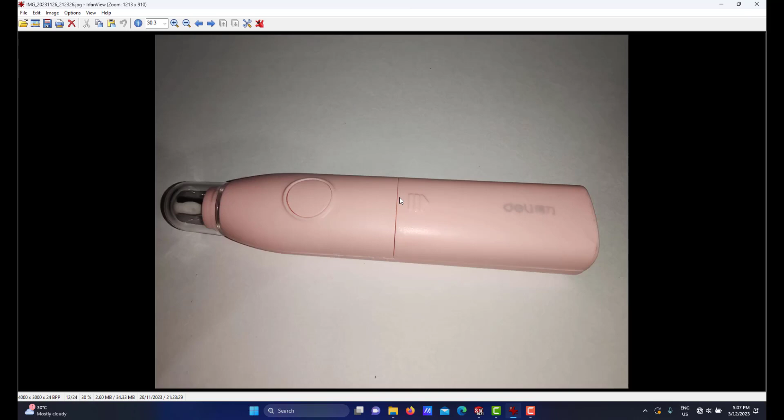For this video, the first thing I'd like to show you is how we can do splitting. If you look at this photo, we have a split here. Let me do sketching. What I mean is we have a split from here. For the top casing, we have a distance of 80. I already took the measurement from up here, and we have a split of 80.

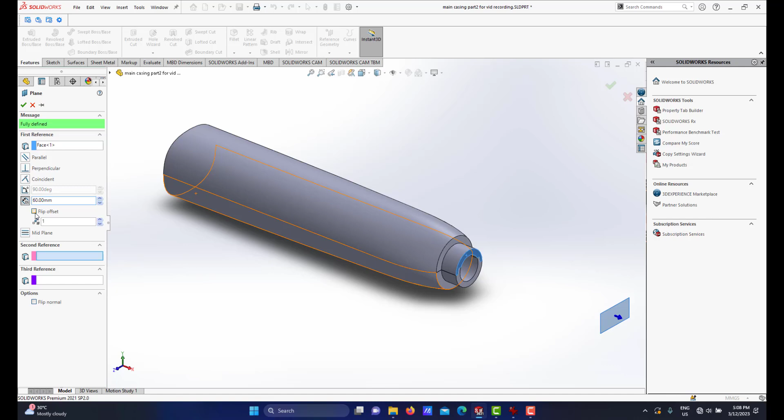So I will create a plane, starting from here, with a value of 80, going in that direction. So I have plane number 9 here. This plane 9 will be my cutting plane to split the top casing into two parts.

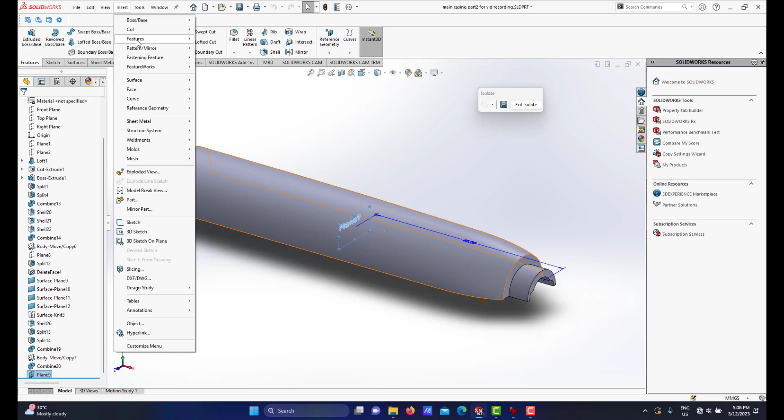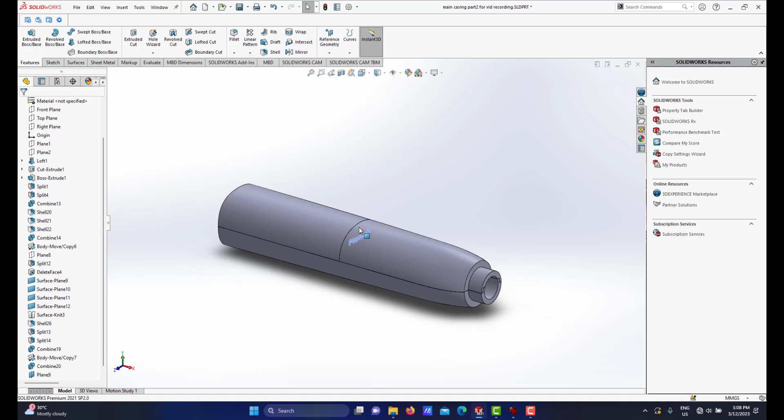I will isolate this top casing and use plane 9 as my cutting plane. Under Insert, we have Features, then Split, then Cut Bodies. I will select both and make sure Consume Cut Bodies is unchecked. Now I have two bodies, the front part and the rear part. Let me exit the isolate. So the top casing has been divided into front and rear parts.

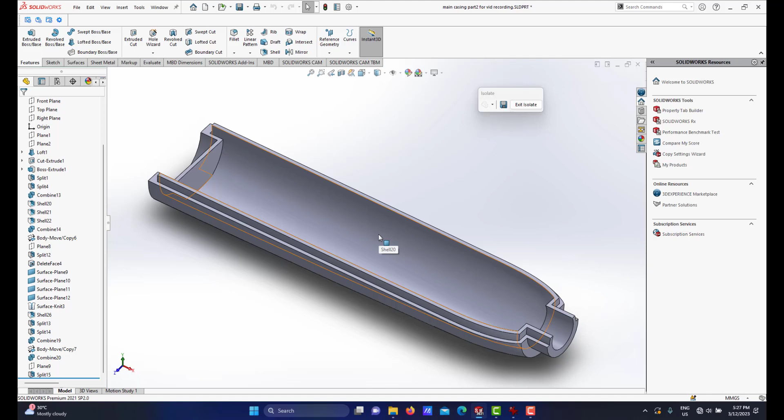My next move is to isolate the bottom casing. If you look at the bottom casing, we actually have a partition here, a partition wall. I will create that partition wall by doing a rib in SolidWorks. Let me give you another view. We have a partition wall here. I already did the measurement: from this back plane to the middle of this partition wall is 50.

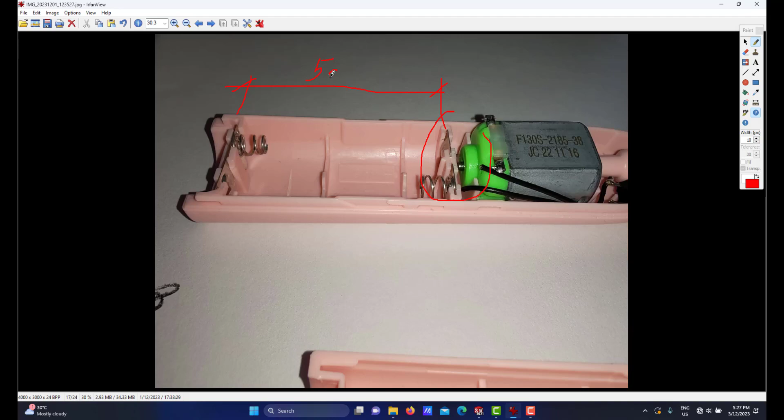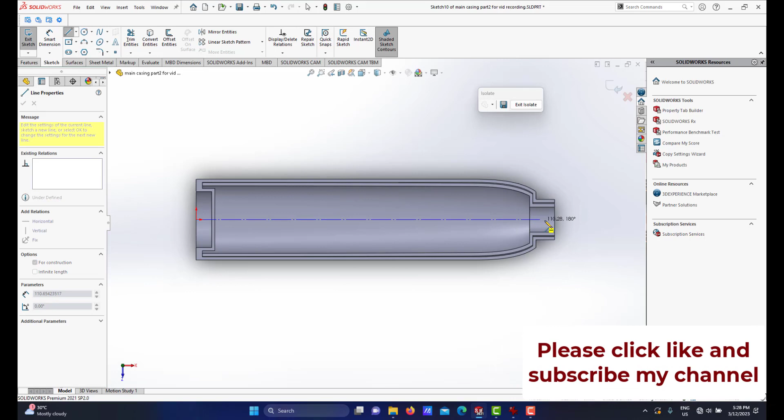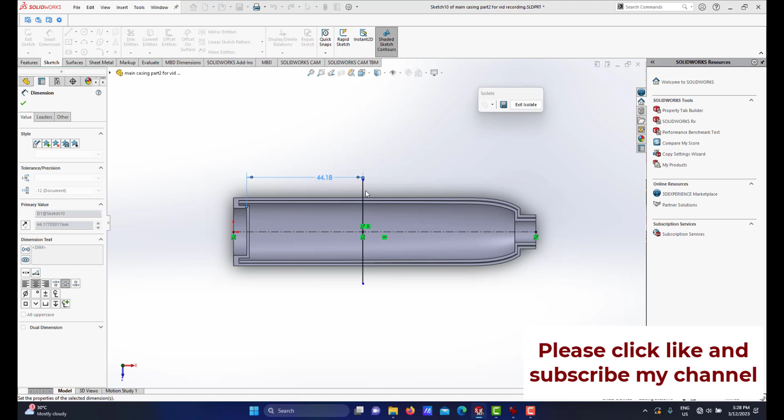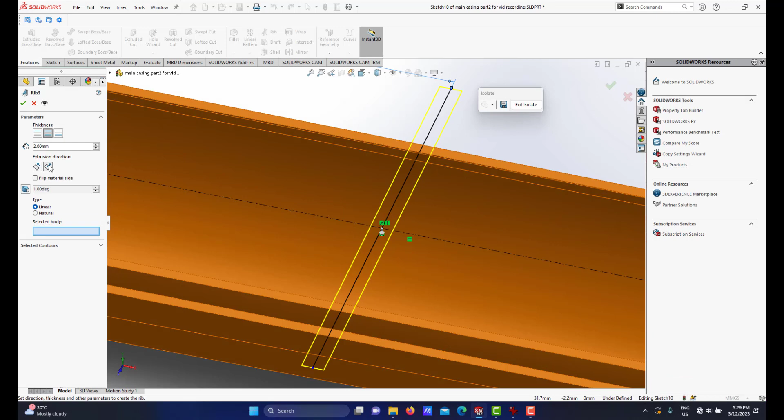So now the distance is 50. What I will do is create a rib, using the Rib feature. Make sure the pointing direction to project the material of the rib is right, pointing right and left, not this way. So under the option, I select pointing downward, set the rib thickness to 2, and under selected body, I select the bottom casing. Then I click OK, and SolidWorks will produce a rib here, a partition wall.

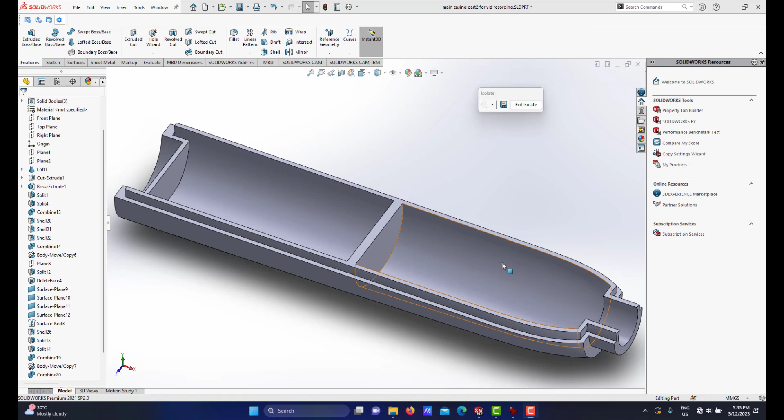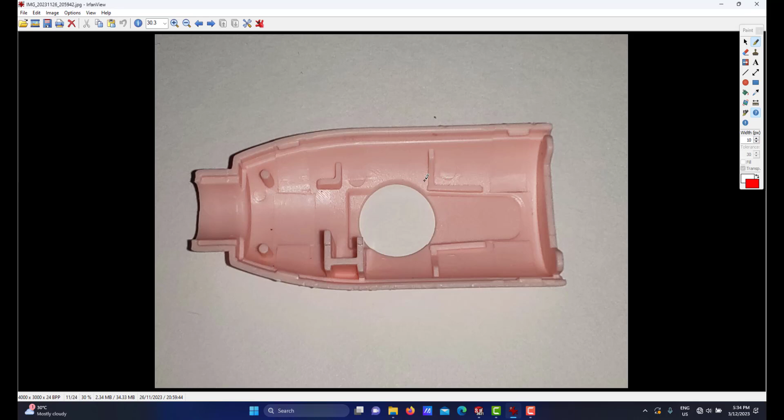Let me show you on this photo. This is the rear part. So when we mount it, it will snap at that slot and groove. If you look at the rear part, let me show you—this is the rear part of the top casing. So we have a key here. I will show you later how to create a key, and this key will slide into this slot. When it goes in, it slides into the slot and snaps into place. So these are snap features where we mount the rear top casing, fitting it into this position using snap features.

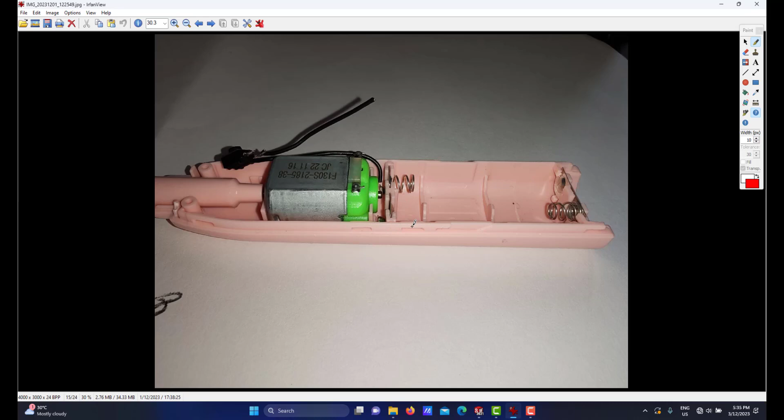So what I will do, let me show you this photo again and give you a proper view for this one. I will create this sketch to make these features, because since the bottom casing has lips, I will do these features on the lips of the bottom casing.

I'll also show you how on the front end we have two grooves here. Let me show you how we will do that in SolidWorks. If I go to my SolidWorks file, this is my bottom casing.

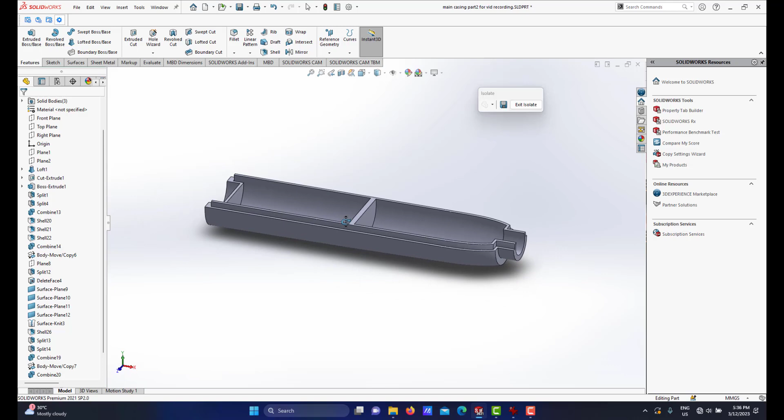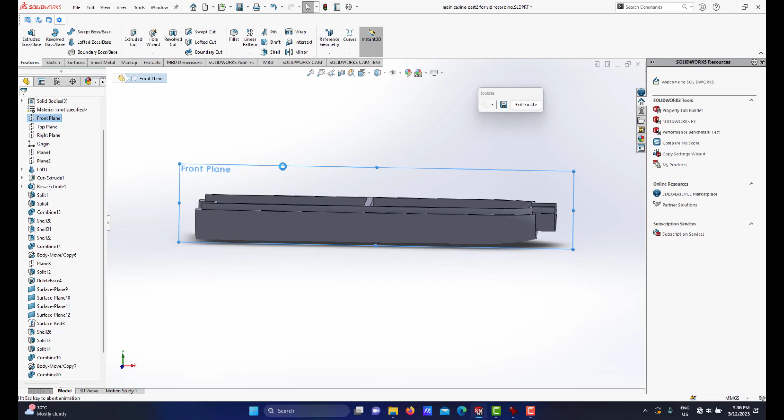What I will do, under the front plane, I will make the sketch of the slot, the groove. I mean on the front plane, I will create a sketch. So this is the front plane, and I will create a sketch like as shown here.

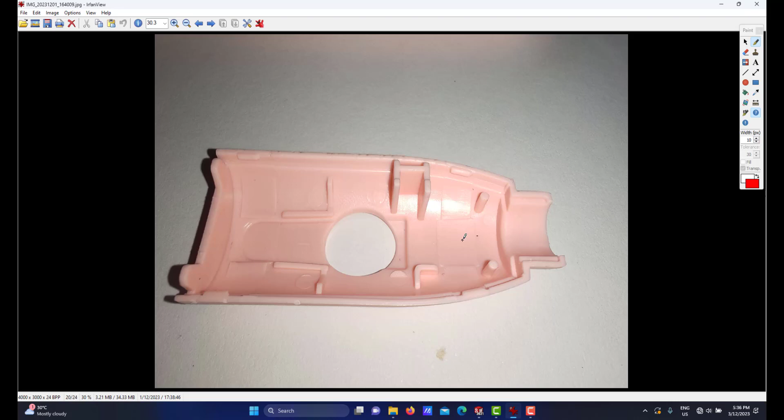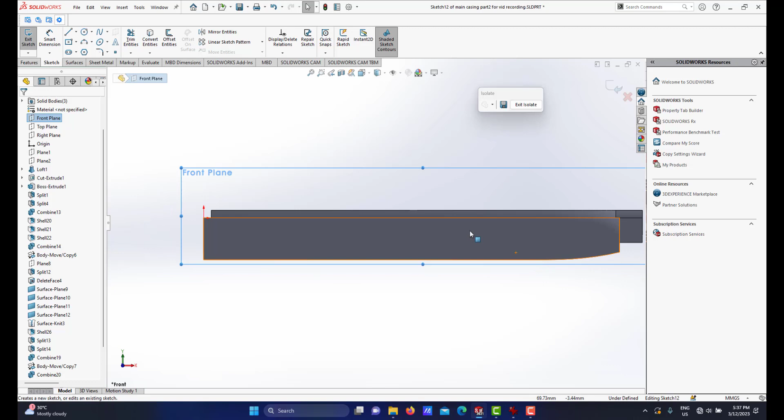I already did a sketch on that. If you look here, this is the bottom, and this is the sketch that I already done. This is the partition from the partition, the distance is there, so I created a sketch like I've shown here. Let me go for hidden lines visible, then I can see the wall partition.

Since the sketching is, because this is the top of the lip, the bottom of the lip position, the sketch will be here. Since the thickness here is 2 millimeters, the height of the lip is 2 millimeters, I will do a sketch like as shown in this photo.

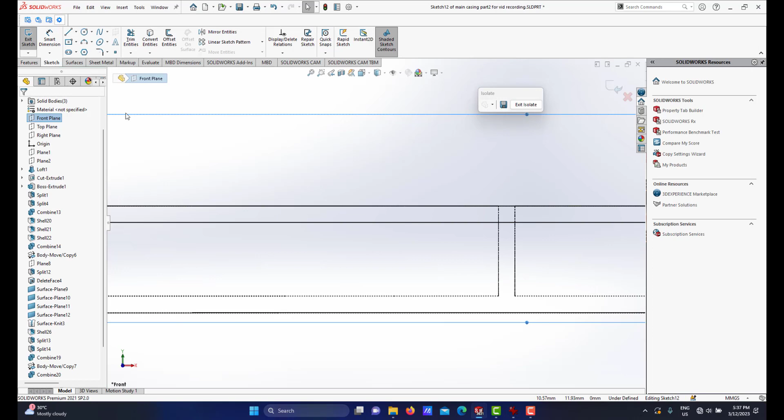So I will create a sketch here, and let me show you. So here, and it touches this point, and it will go like this, and it's 1 millimeter thickness, and it's straight like this, and it goes like that.

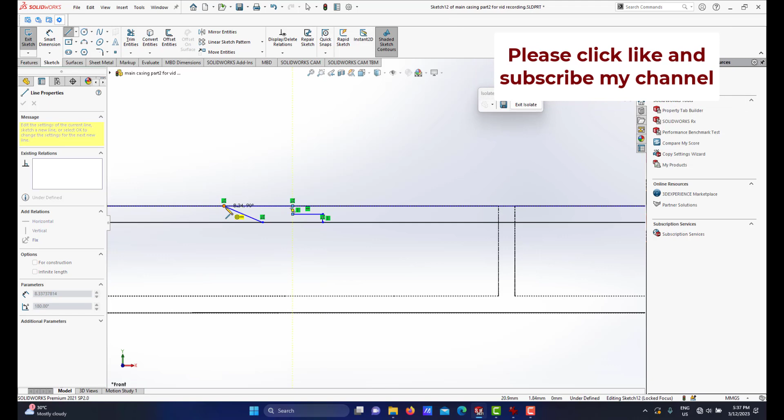The dimension here, if you look, from here to here this is 4. Before I do that, I'll make another one for the groove of the key. I create a corner rectangle, one is here, like that.

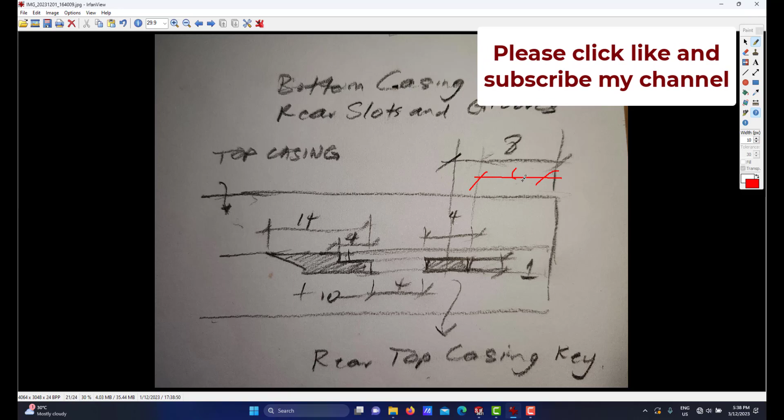Now I'm giving the dimension. The dimension is 4, and the distance to this partition is 8 from the middle here. It means that from here to here is 6. So that is 6. I will give a dimension, I create a dimension from here to here is 6.

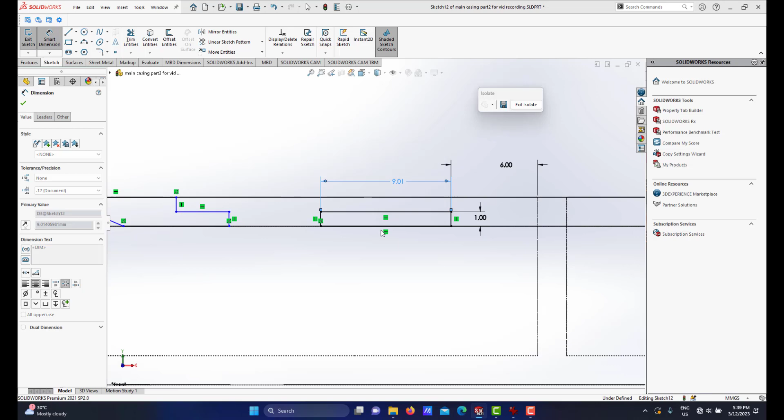Then the height, since this is 1, and the length of the groove is 4, and the distance from this to here, if you look under my sketches, is 4. I give all the dimensions needed to create this. This is 4, and the height is 1.

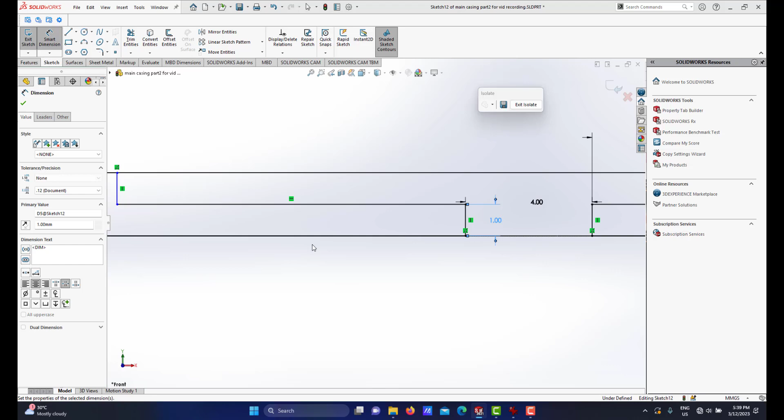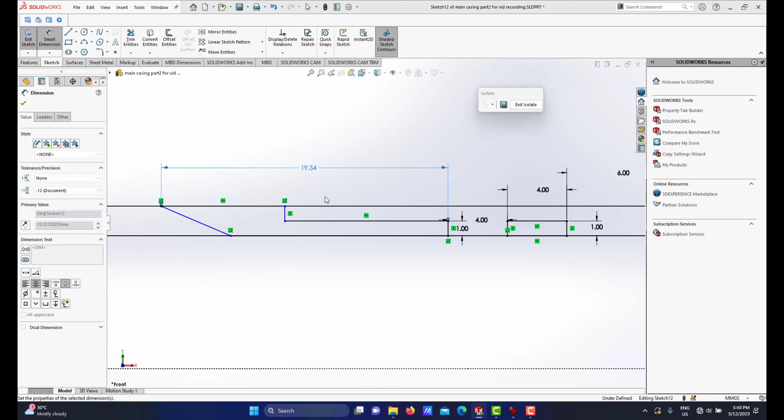As you can see, here is 4 and here is 14, so just from here to at the end here is 14. Hold on, it's not reading. And on this one, I can simply sketch like this, I can simply drag this thing.

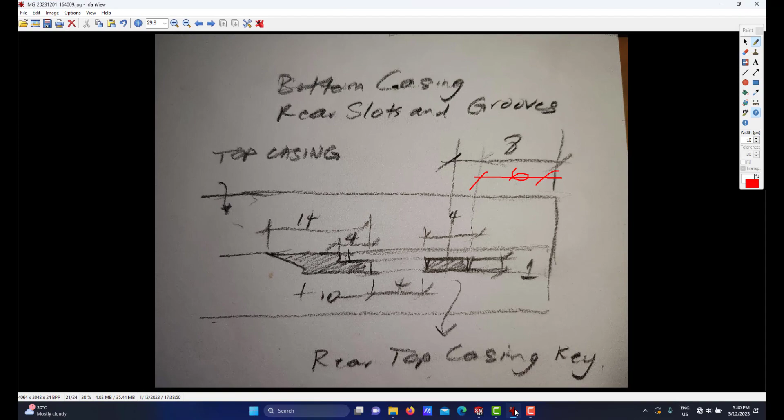And if we have 4 here, this is 4. Then from here, here is 10. Okay, I have a fully defined shape for the position at this side for me to create the slot and the groove. Let me check here.

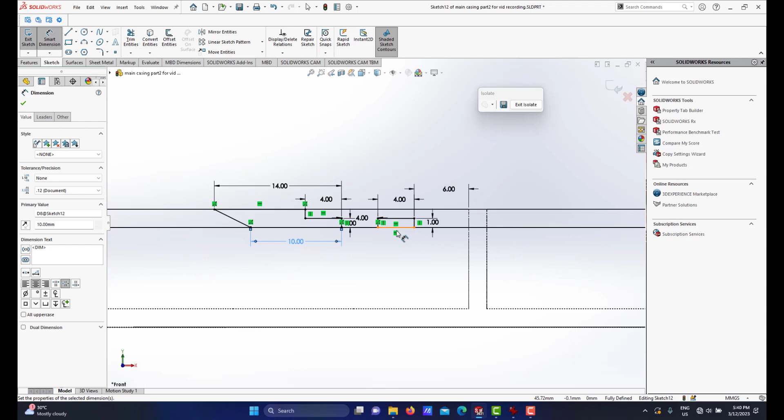Alright, another sketch is at this end, this side. If you look, I have the sketch. Hold on, this side, okay this is the end. From at the end here is 6, and this is the distance.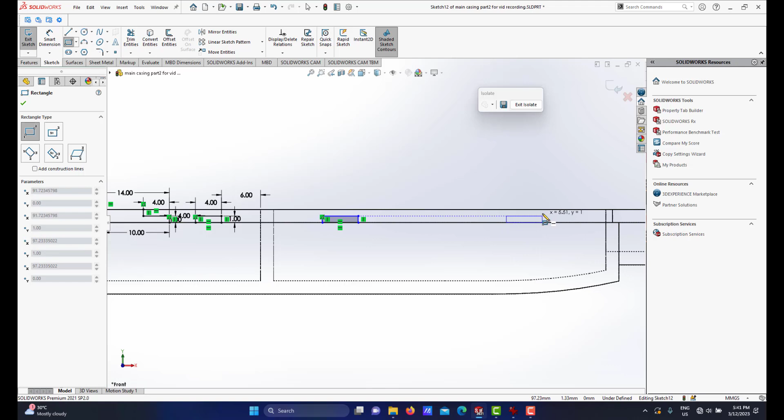For this side, I create a corner rectangle, one is here, and one is here. Now the dimension here from here to here is 7, as shown here, from this side. What I mean is from here to here is 7.

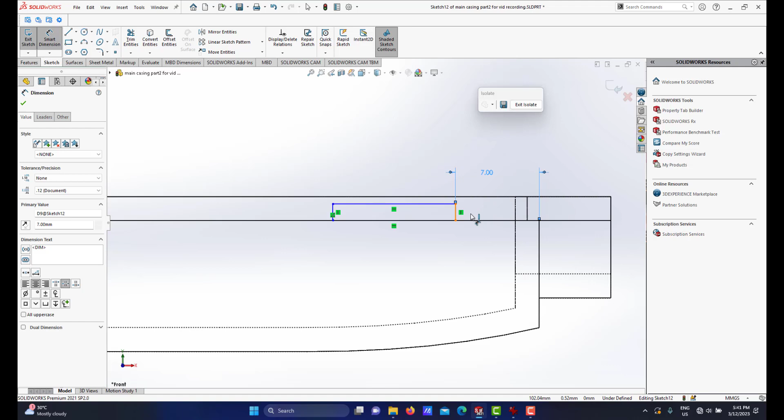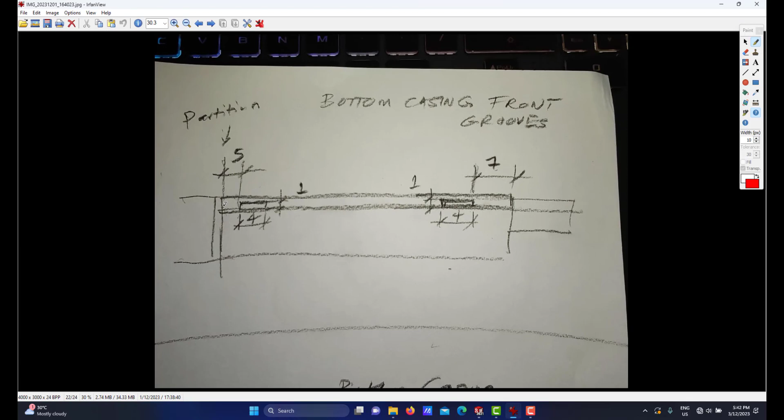And the height is 1, and the length is 4. And from here, if you look at my sketch, from this partition wall is 5 there. From this wall to this side is 5.

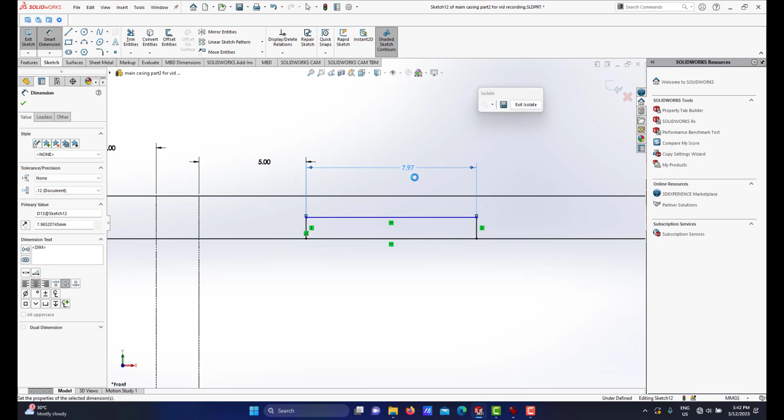And the distance here is 4. And the height, hold on it's not reading, and the height here is 1. Okay, now I have a fully defined sketch linked at the middle here for me to do the features, the slot and the groove for the lips of the bottom casing. Let me make the view shaded.

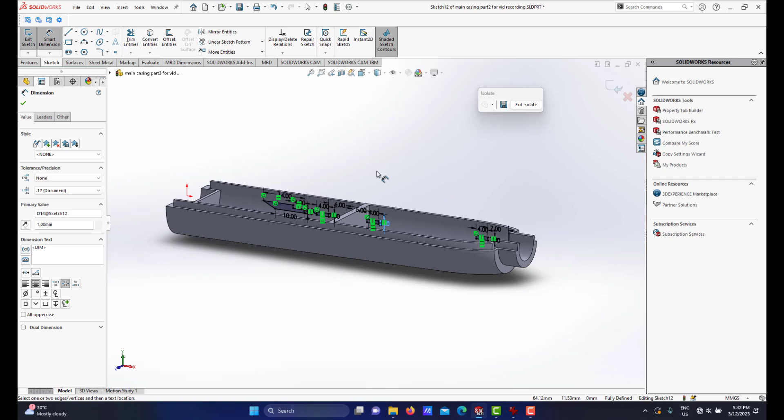Okay, my next move, since we have completed all the sketches for us to do the features of this slot and the three grooves, so under features here, what I will do is extruded cut. By default, when you do extruded cut or boss extrude in SolidWorks, it will start from the plane where you are on, in this case the front plane. But in my case, I want the cut to start at the surface of these lips.

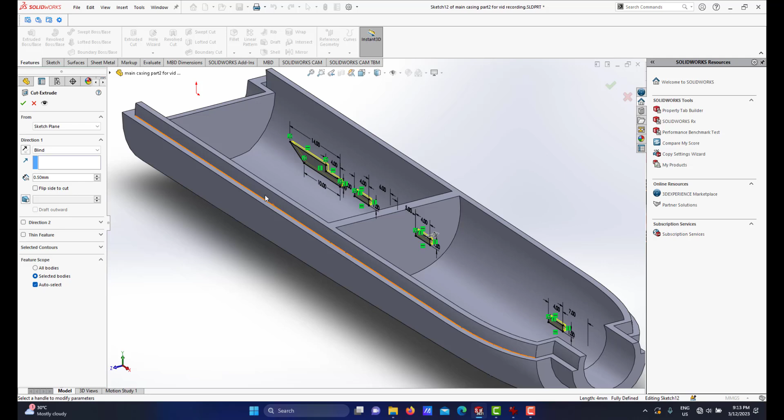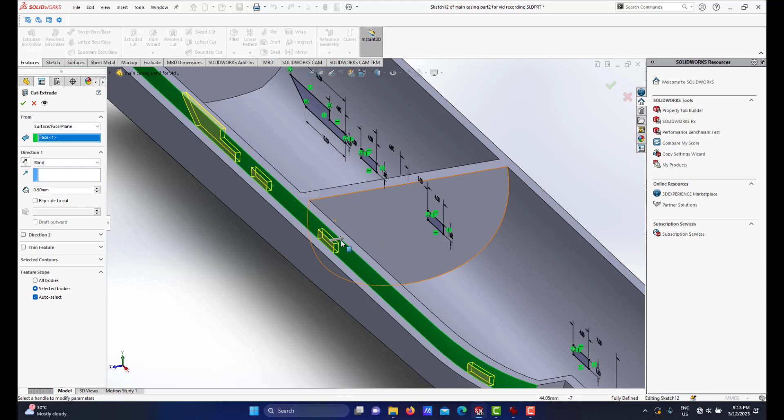Instead, under the menu here, instead of sketch plane, I will select Surface/Face/Plane. I will select it to start from the surface of these lips. So what SolidWorks will do is start the cutting from that surface, and make sure the direction is correct.

Since the thickness of the lips is 1 millimeter, I will use half of it for the depth of the slot and the groove, 0.5 millimeter. If I click OK, so this will appear.

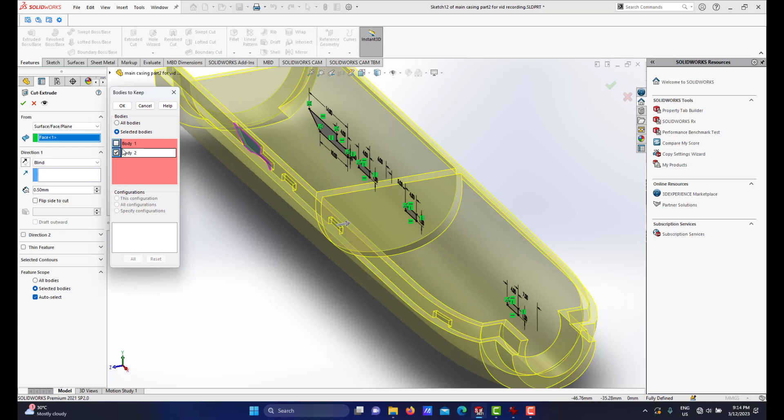For this case, you don't use all bodies, you must use selected bodies. In this case, we select the bottom casing only. Do not check like this, this is not the right way to do it. Uncheck body 2, make sure the correct body is selected in blue color, this is the bottom casing. If I click OK, SolidWorks will create the slot and the three grooves.

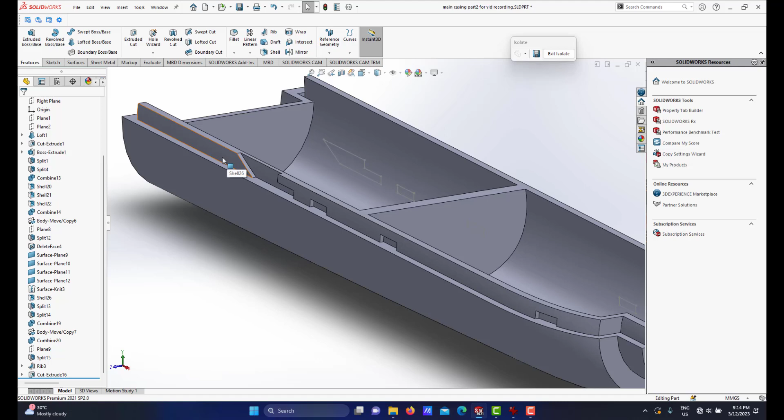Okay, what about the other side? I cannot mirror the features I've done here, because the feature started from this surface to do the extruded cut. If I mirror it, the features will be wrong because this is the surface on the other side. So in order to do the mirror of this, I have to do it again. I have to reuse the sketch I've done to make it on the other side. For this case, I will create another front plane.

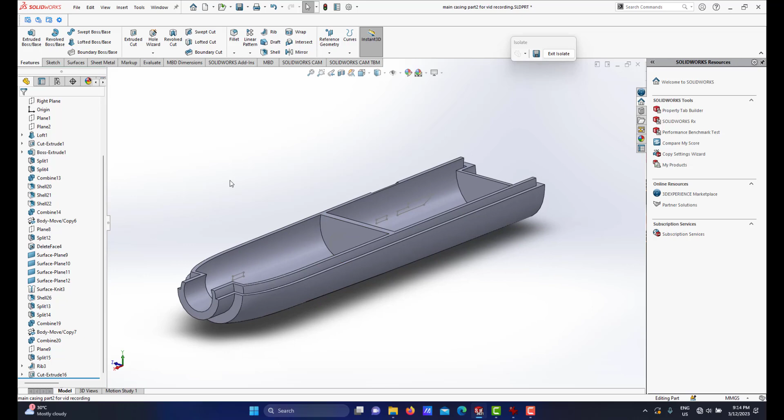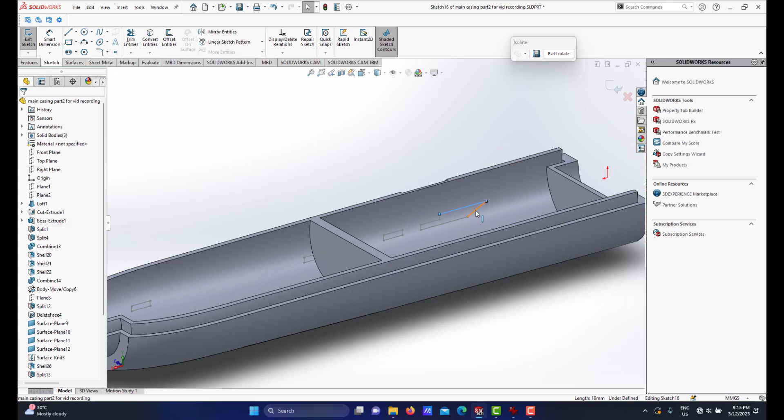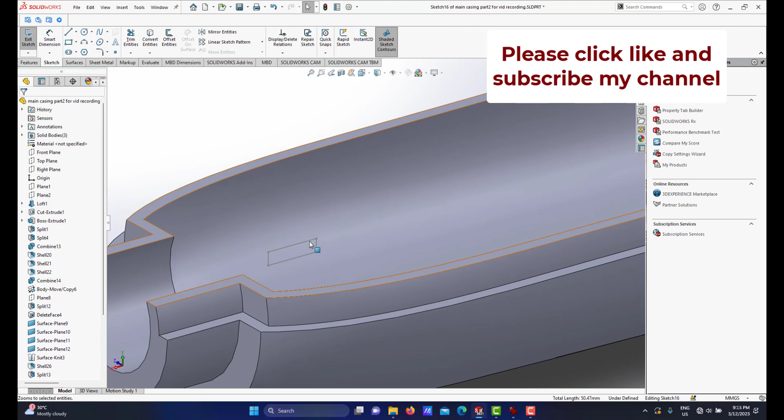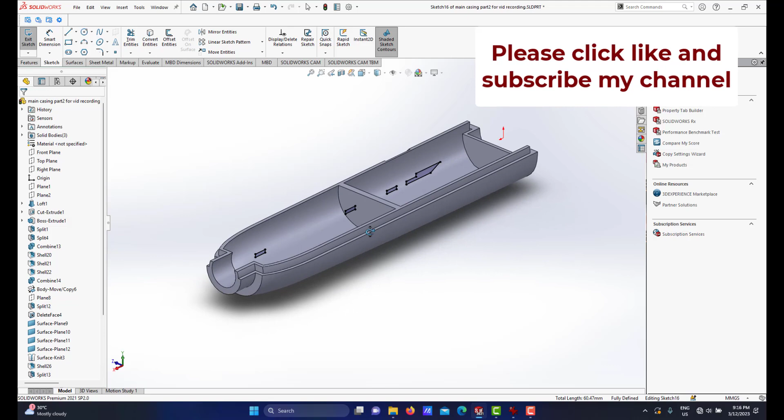So I'm now in sketch mode on the front plane. What I will do is duplicate all the sketches I have done by using convert to entities. I will manually select this one, holding my control key, selecting all the sketches I've done on the previous front plane, holding down control to select more than one. After everything is selected, I will click convert to entities. Now I have my sketch, traced from the previous front plane sketches.

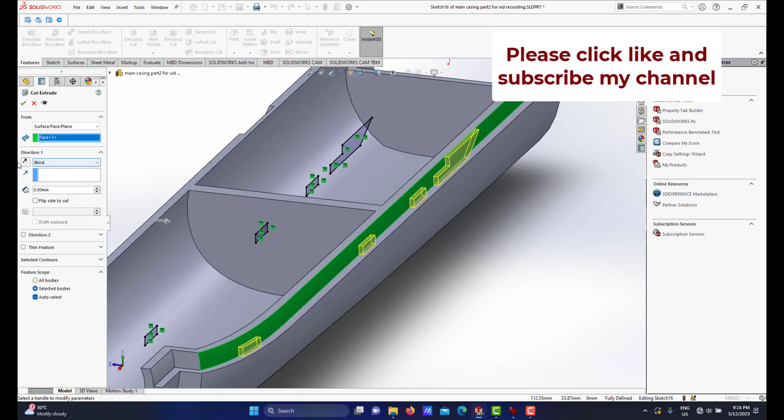Now I can repeat the same procedure. Features, I will do extruded cut. Instead of sketch plane, I will select this surface. But now the direction is not this direction because this is not creating a cut through, so the direction has to be reversed, and make sure it's half of the thickness of the lip, 0.5 millimeter. Then if I click OK, use selected bodies, click the bottom casing, and click OK.

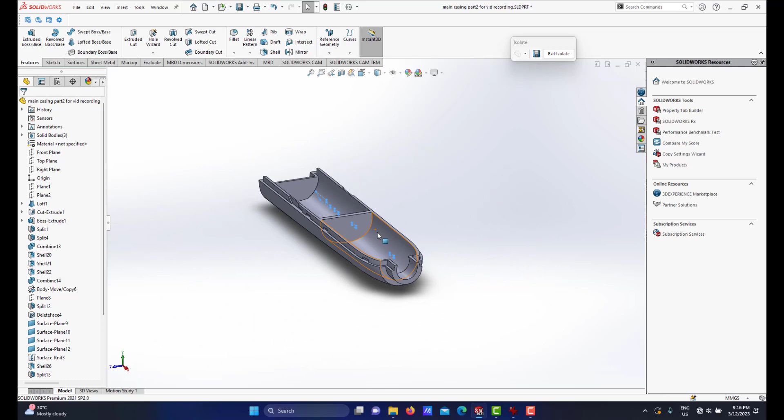And now I have the slot on the other side. All right, that's how we do the features of this slot and also the groove for both sides. Let me save my file first.

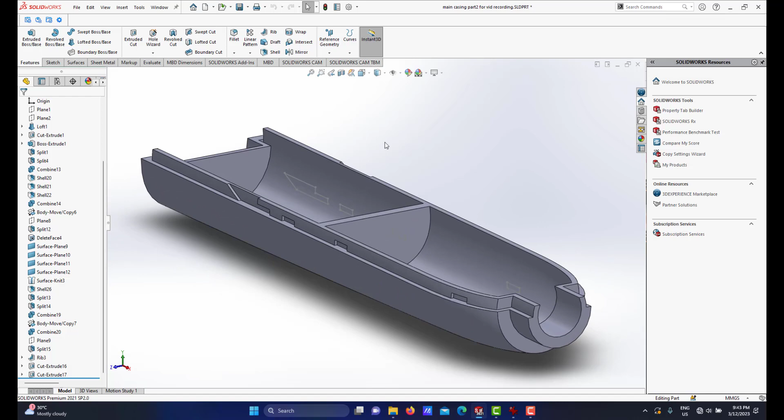All right, the next thing to do, if I exit the isolate, what about if I isolate and select the top casing, the rear top casing. Since for the bottom casing I have already done the slot, which is these two sketches, one meant for the slot at the lips of the bottom casing, and this one is the groove where the key will snap.

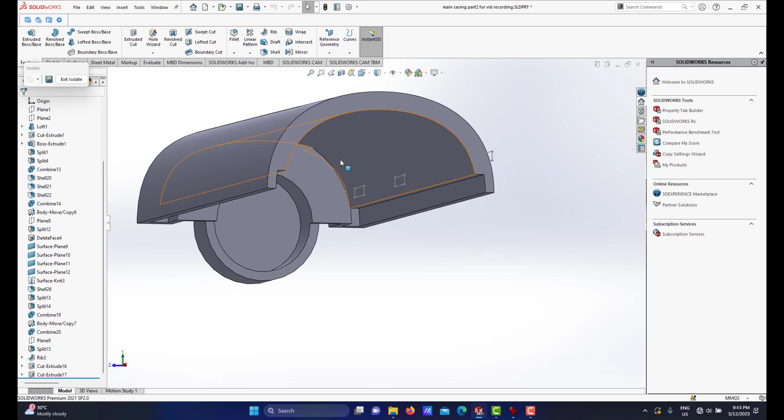So for this top casing here, the rear top casing, I will create a key, a snap feature to lock the position of this rear top casing to the bottom casing. So I don't need to create the key of this sketch, which is meant for the slot for the lip of the bottom casing. The only thing I need is to create a key of this.

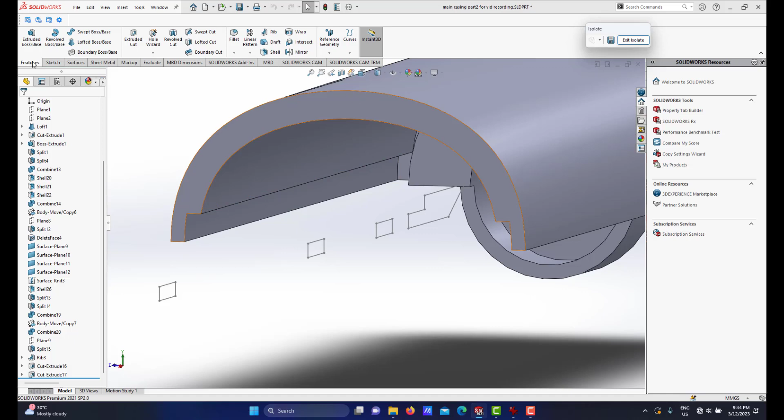In order to do this, I just need to create a key. Instead of extruded cut, I will do boss extrude. Under features, I will do extruded boss base, and select only this square. The direction is not this direction, make sure the direction is reversed. The thickness of the key is 0.5, similar to the previous groove which is 0.5 depth. So this is the key that will be attached to this upper top casing, the rear top casing.

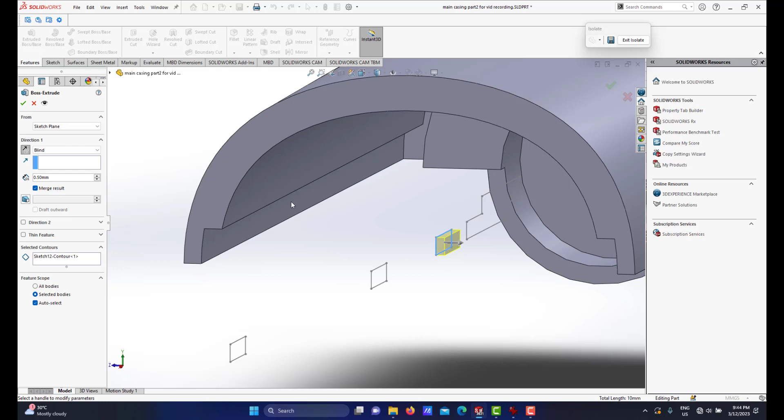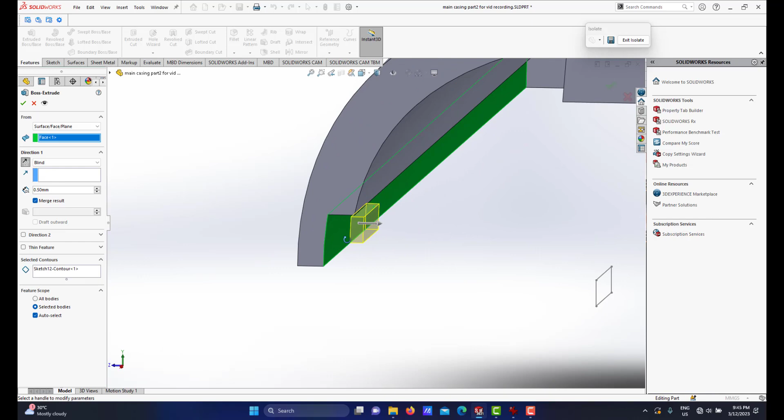Instead of starting at the front plane by default, we will start from the surface. I will select the surface here, so the key will start at the surface and create a key starting from this plane with 0.5 thickness. Since the groove we made has a depth of 0.5 thickness, it will snap into that groove, then lock the position after it passes through the slot of that bottom casing. I hope you understand how the features work for the snap and groove features.

So I just need one. Okay, one thing to mention to you. If I click at merge result, by default when you do, it will merge to the top casing. If I click at it, it will become an error because it's unable to rebuild, since we will have zero thickness. So in this case, do not click at merge results.

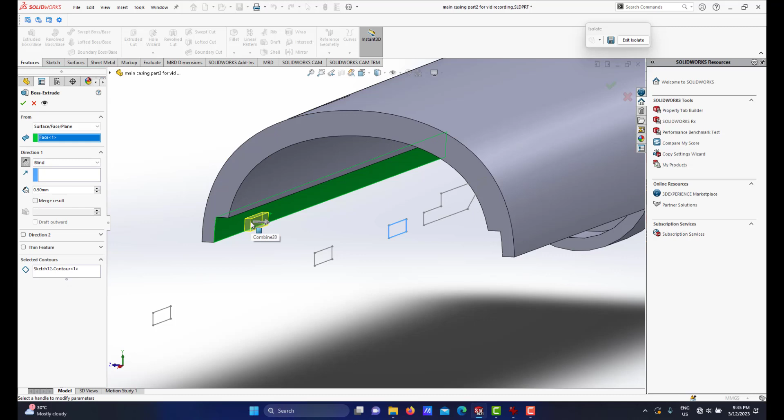I will show you, we make it as a separate body. So I simply click OK. This key that I've just created is not part of this casing, it's a separate body. So we need to join it by using combine.

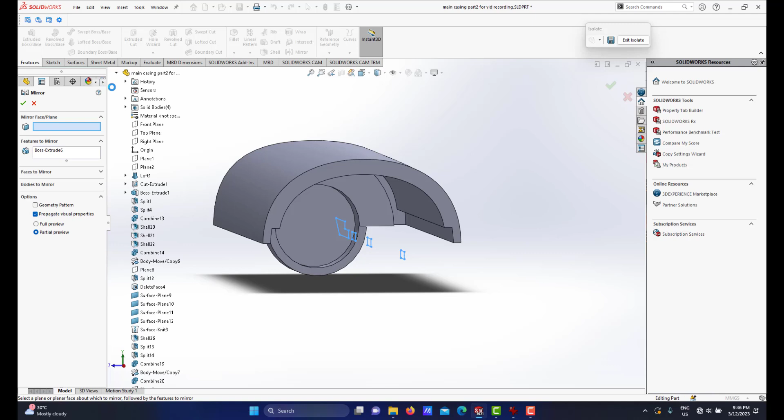But before I do that, I need to mirror on the other side for this key. So what I do, I will do mirror, and the mirror plane is the front plane. In this case, I will not use features to mirror, because if I click features to mirror, it becomes impossible since this thing I want to mirror is not a feature of this top casing.

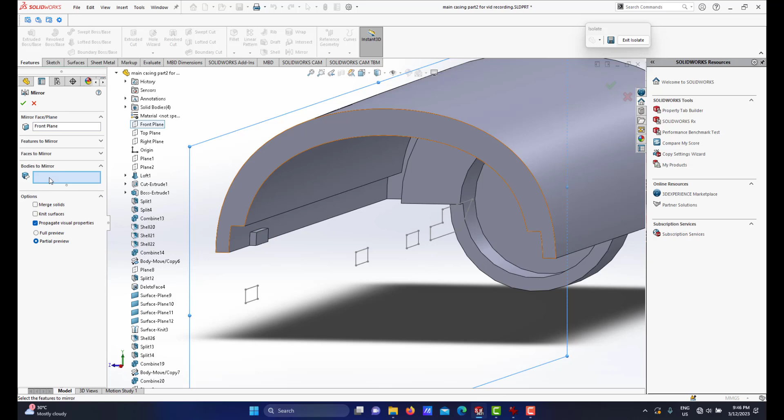So I clear this one. It is a separate body, so I have to use bodies to mirror. Then I select this body, then I click OK. Then you will get the mirrored body of the key on this side.

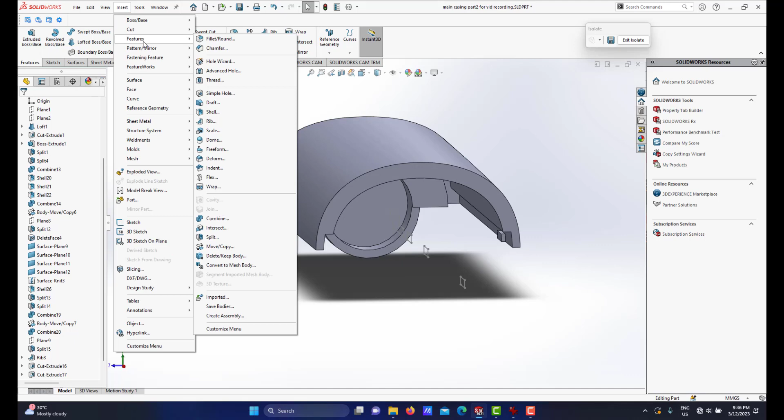So what I have to do then, I have to join it, I have to combine it. Then I will do insert, features, insert, features, combine. Instead of subtract, use add, and I will select all the three bodies. So it becomes one body.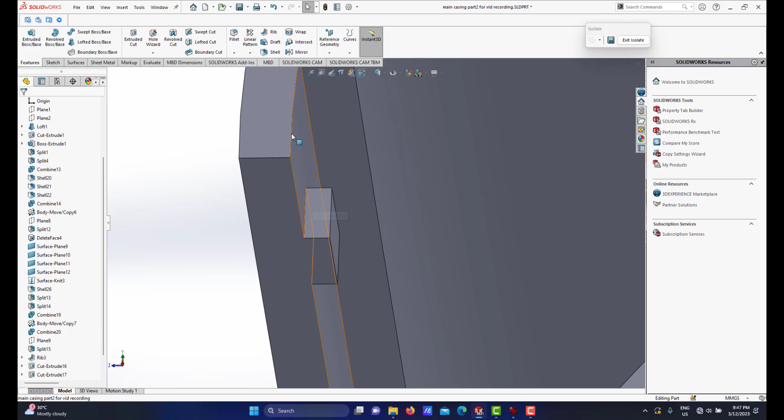So it means now, if you look, the key is blended, it's already jointed with the rear top casing. Same goes here, since we have combined it into one body. So this is the key for the top casing.

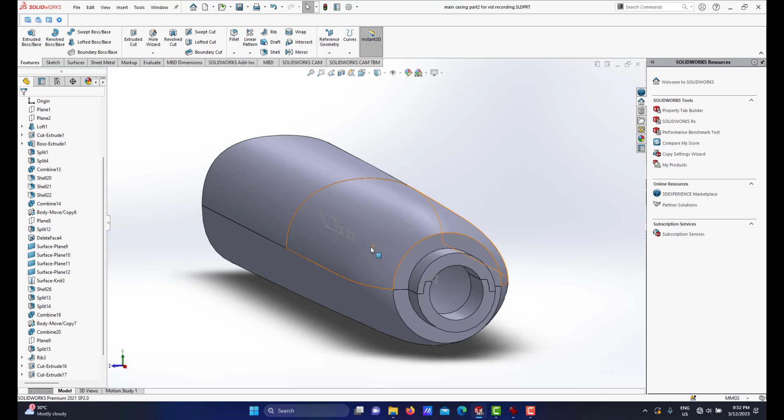All right, the next move, I exit the isolate. Now about the front top casing, I select the front top casing and isolate it. Same procedure like what I did for the key for the rear top casing. For the front top casing, the sketches we need are these two sketches to create a key.

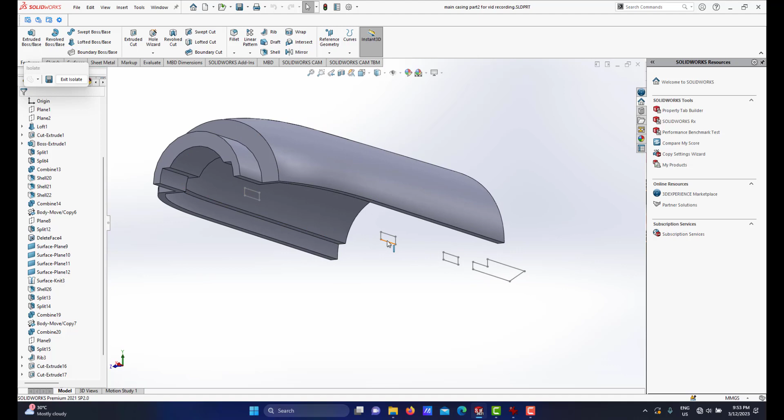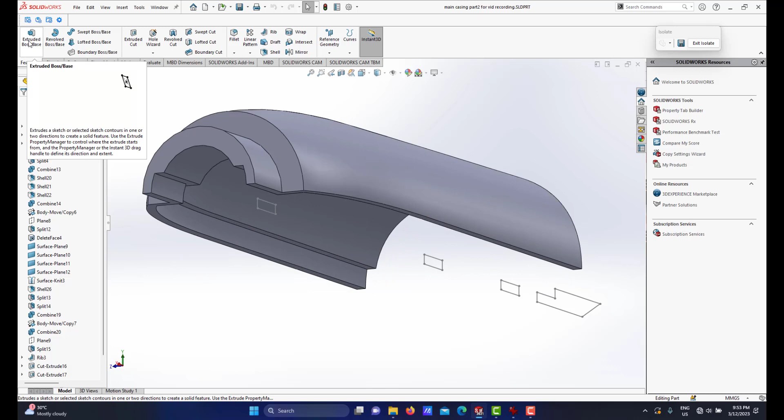Similar approach. Since I am not on one sketch plane with two sketches, I do it two times just to show you. Under features here, I will do boss, extruded boss base.

For this case, I cannot select both rectangles, I have to use them one by one. So, similar approach, the direction is reverse, thickness is 0.5, and from here is a surface. Select the face, but do not click merge result, to make it separate bodies.

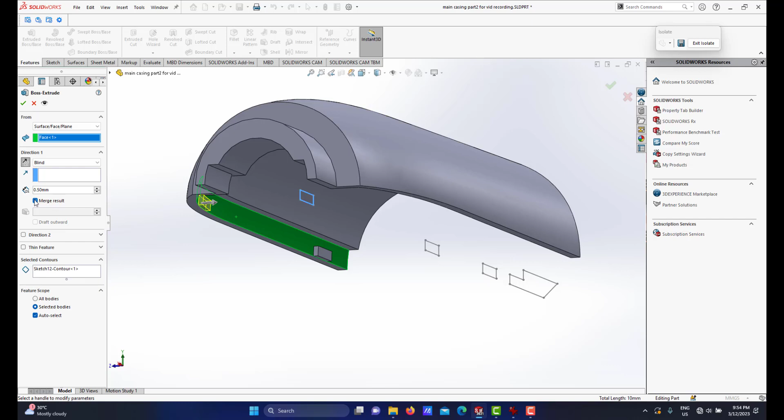Then I will do the same, another boss extrude. Select this rectangle, reverse direction, from the surface plane here. Do not click merge result, 0.5 thickness also, and click OK. So I have two separate bodies here.

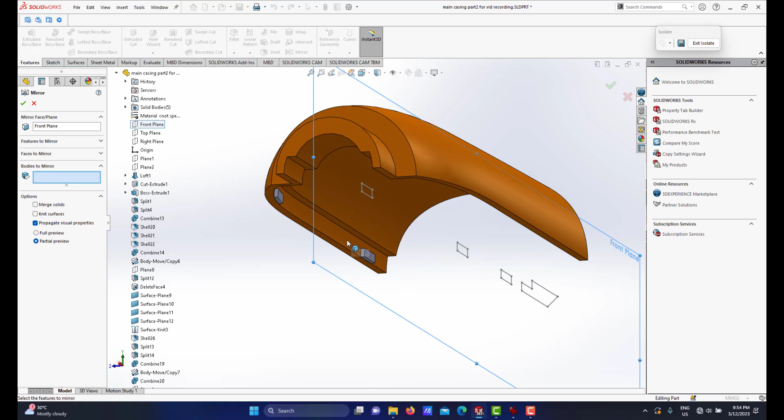Okay, then I will do mirror, mirror, and front plane. Then do not use features to mirror, clear it, use bodies to mirror, and select both keys. Then I click OK, and now I have the key on the other side for the two keys.

So I need to combine it to make it one body. So insert, features, combine, add, select all the bodies, hold on, to become one body.

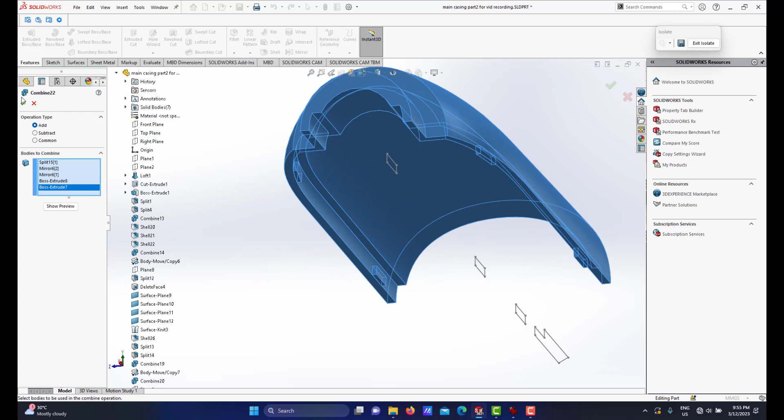Now I have my top casing, front top casing, as one body with the key. All right, let me exit the isolate.

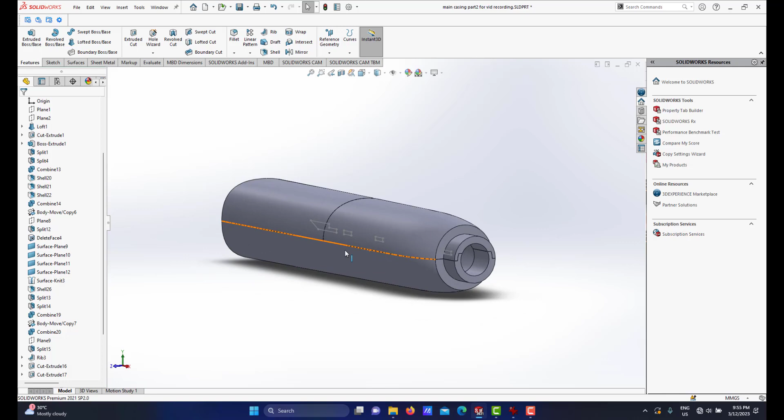So this is how we do the features. Basically, I've done the features that attach the rear top casing and front top casing to the bottom casing. This is how we do it. So just to show you, everything is in place.

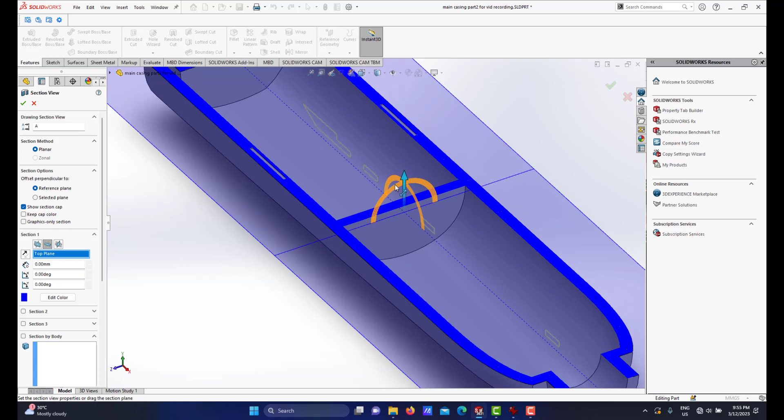Let me go for section view. I would do a top section view just to show you everything is in place. Let me drag it a little bit upward, about this level, just to show you the features. Okay, so this is the section view.

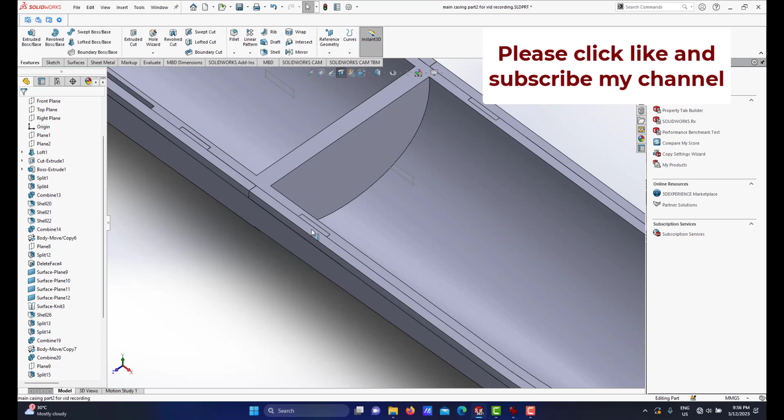So the rear top casing, when we slide it, it will pass through the slot and snap at this groove of the bottom casing. And for the front top casing, we will snap it, the key and the groove in position. I hope you understand what I'm trying to explain to you.

This is basically for the top, we have a plastic component, bottom casing and top casing. These are the features showing how, what I mean, to fit the top casing to the bottom casing.

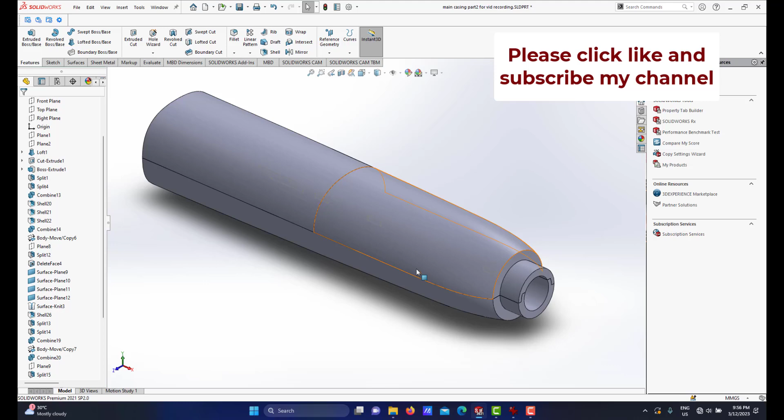Okay, so I think I have to end this video. I hope you understand what I'm trying to explain to you. Inshallah, in the next video I will do another detailing for both the bottom casing and top casing.